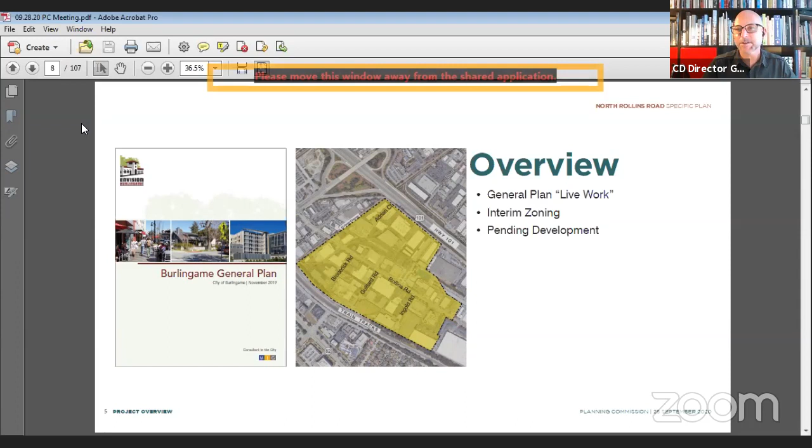We have interim zoning right now, which has guided a couple of the development projects so far. We will be coming back, spoiler alert, to the Planning Commission with a permanent version of that zoning next month. Meanwhile, we have had a couple of development proposals and projects, one approved and one under review, on Adrian Court and on Ingold Road. Those have been the sort of beta test or template for future development in this area.

Next, please. Oh, I am the next person, sorry. There you go. Do you want to introduce our committee too?

Certainly. So we have a community advisory committee, which includes two members of the city council subcommittee for this project, Vice Mayor O'Brien and Councilmember Colson. Then we have the chairs from the commissions: Audrey, Chair Say from the Planning Commission, Chair Wetton from the Transportation and Parking, Safety Commission, and Stephanie Lee, Commissioner Lee from the Park and Recreation Commission.

Then we also have a number of stakeholders from the project area, and we tried to be really representative in terms of both new players and long-established players. So you'll perhaps recognize some of the names here. I won't go through them all, but Guittard is probably one of the more established players, whereas Lisa Lilliland is from Proterra, who's probably one of the newer ones. And then Elaine Breeze, who you know well, represents the developments that have been in the area.

We also have an at-large member, Raymond Larios, who, while he's not within this project area specifically, we wanted to include a voice of the next generation, so to speak, in terms of interest in planning and transit-oriented development, and just have that kind of perspective as well.

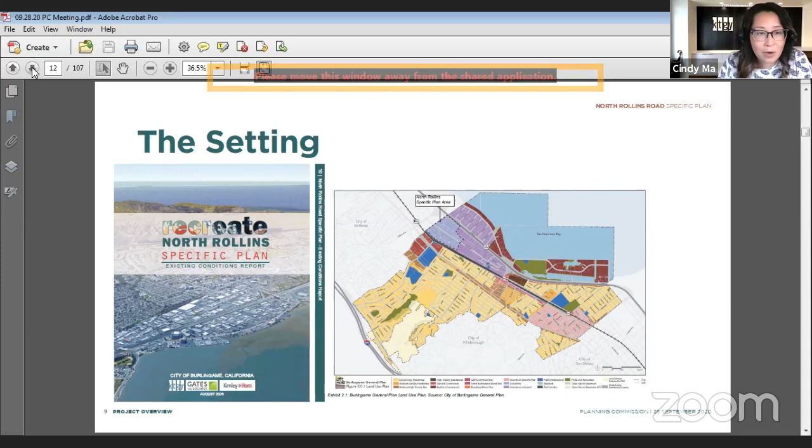We've included the general plan map on the slide just to show that the project area is on the northern edge of the city of Burlingame, right up against Millbrae, with lots of great opportunity in terms of what it can mean as an entrance into the city as well.

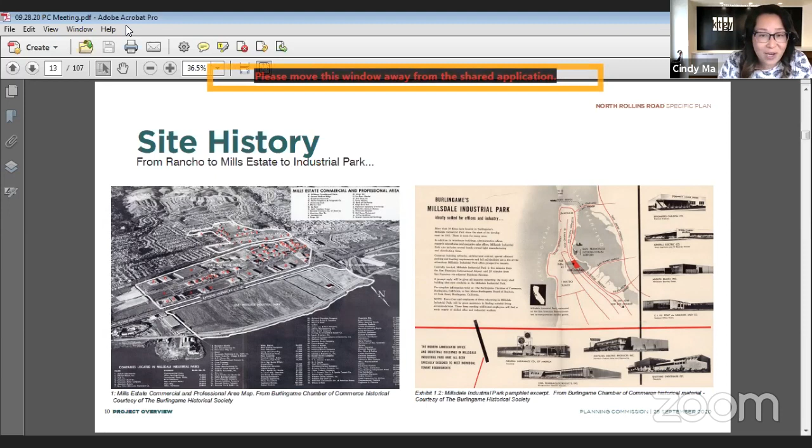When we delved into the project area history, we were connected with Burlingame's Historical Society and got really great information and graphics, which we wanted to share with the group here today. Before North Rollins became the industrial park we know it is now, it was originally native land, then the Buri Buri Rancho of the Sanchez family, and then the Mills estate from the 1860s to about the 1950s. We hope this historical context and narrative can be incorporated into the recreating of North Rollins on this project.

Of the 87 acres today, about 22% is used for industrial, including businesses such as Guittard, Seas, public storage, and other warehouse businesses with showroom components. 20% of the area is made up of commercial service and retail, including office headquarters of software, electronic, and freight forwarding businesses, and also sports recreation facilities such as Primetime Athletic Club. About 8% makes up commercial service, including moving companies and insurance offices.

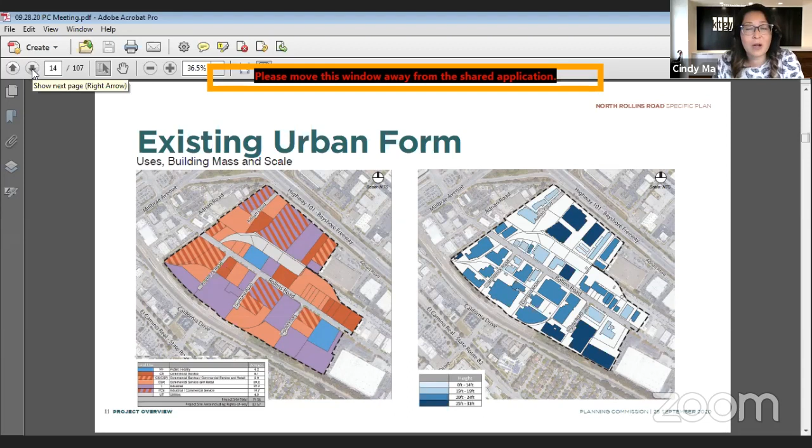In terms of the pictures, we noticed that while there are sidewalks throughout the project area site, they may not all be accessible. Some are very narrow with fire hydrants or poles sticking in the middle. There's many driveway curb cuts that can be quite disruptive for pedestrians. We understand they are necessary for the current use in the area.

There are large front setbacks, which we have seen creatively transformed into pockets with inviting landscape, assuming that's a residual of the subdivision parcelization that happened during the 1950s.

The utility and power lines are also very visible as we were walking around. They're located towards the east, but when we look towards the west, we notice there are quite a bit of peekaboo views to the hills down the secondary streets off of North Rollins.

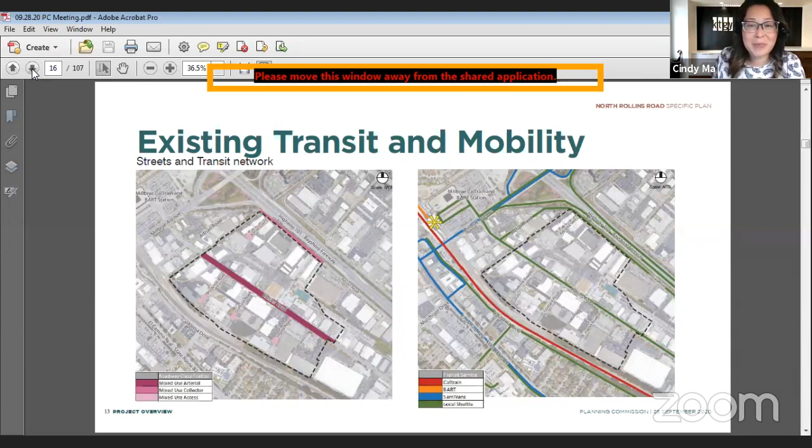So as mentioned earlier, one of the goals of the specific plan will be to identify and develop a strategy to create more open space amenities in the area. We're really seeing this as an opportunity to connect open spaces together and also to the overall health and project vibrancy.

In terms of sidewalks, again, as one of the previous photos show, they are existent, but they can be considered minimum along Rollins Road, and in some cases in the secondary streets need to be completed.

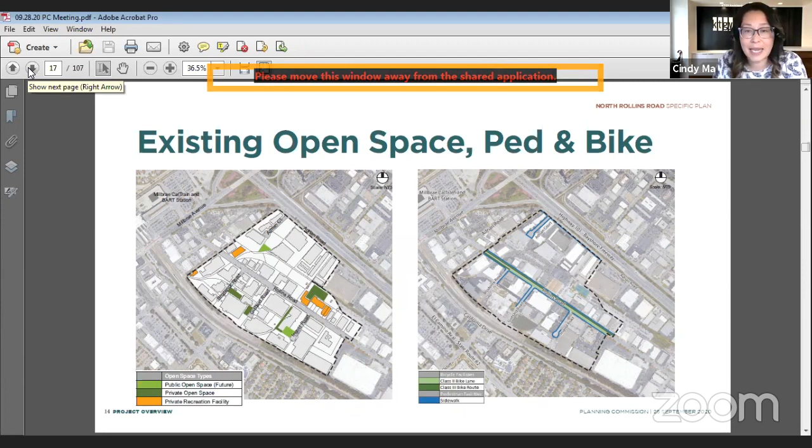I just went through a lot of information, and all of this is taken out of our existing conditions report, which can be found on the project website. We'll be happy to send a link out to the planning commissioners in the chat or after this meeting.

We understand the railroad tracks and the eucalyptus windrows are fixed edges, but how can we see them as ways to look beyond, with views to the hills and such opportunities? There's the El Portal Channel to the north, which could have great potential as an open space edge and also as an opportunity for a northern gateway. And then we have great views to the water to the east. In the TAC and the CAC meetings, we've heard suggestions and talks about how do we connect to the other side of the freeway.

So those are all things we're hoping to explore together. So with that, I'm going to transition this next part of the presentation to Linda, who'll go over the outreach strategy and lead us into the exercise.

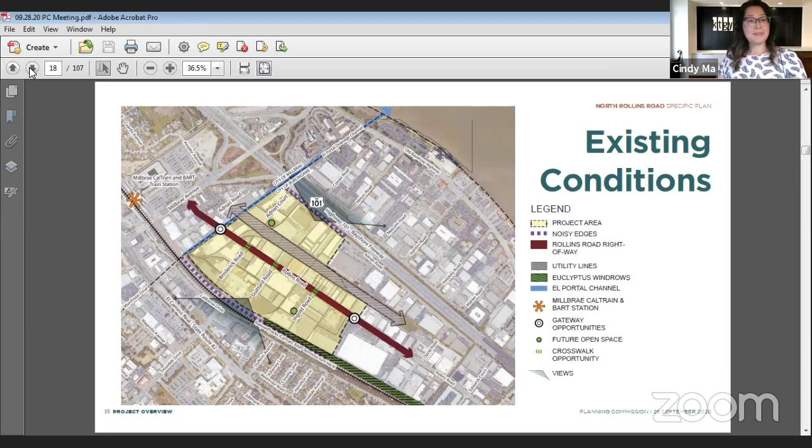Thanks, Cindy, that was great. I'm sure you all understand that a specific plan is only as good as how it is tailored to the specific values and needs of the community. To do that, we need to really reach out to the community. So we're proposing, as Cindy mentioned, a 4-phase process where we develop guiding principles, leading us to create some alternatives, a preferred concept, and then a draft plan.

At each phase of this project, we'll be meeting with the CAC, the TAC, and the community at large, as well as having key meetings with the City Council and the Planning Commission checking in. So this is really a community-driven planning exercise.

Next slide, Kevin. So to date, hopefully you'll have a chance to visit our website. We've got a website up where we're posting documents and sharing information as we go through the project. We have a great CAC, which your chair is actively participating on—thank you very much—who already have been giving us wonderful insights. The CAC also, we're hoping, will be ambassadors to other people, merchants, business owners, and property owners in the North Rollins area, to serve as a trusted source of information for people.

Next slide. We're having our study session with you right now. We're planning to hold a community virtual meeting in the latter part of October. One of the things I wanted to emphasize is that we're trying to really reach out to the local businesses and property owners in the North Rollins area. The community at large can participate, but we will be sending a postcard to everyone in the local area to really encourage them to participate and share their input in the meeting.

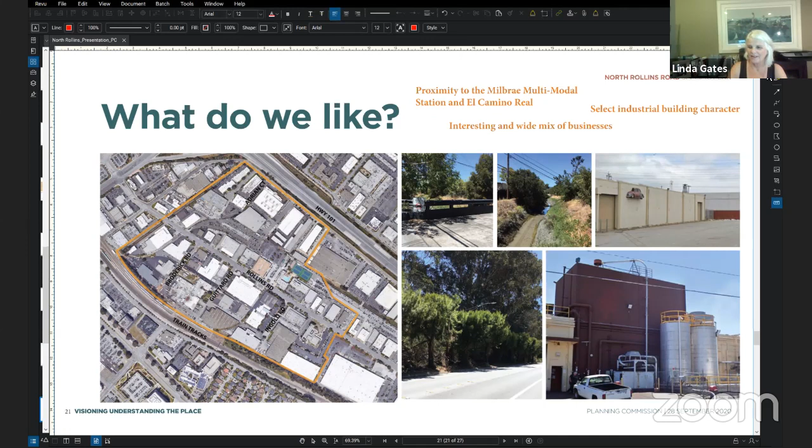Okay, yeah, I'll go first. I like the axis of Rollins Road, so I'd like to see the character from the south continue on to the north as it's developed. No, I'm being facetious from my last question. I think there is an opportunity for strong connections. I know we're looking specifically at the North Rollins Road area, but it is an opportunity for a strong boulevard scheme of some sort, and because of the width of that street, there's an opportunity for a street diet, traffic calming, et cetera. But before I go there, let me answer your specific question about what we like. Yeah, I agree.

I like the quirkiness, the opportunity for a mix of uses, not mixed use specifically, but a mix of uses - an opportunity for a multitude of things to happen in this area that could work together in harmony once it's well planned and detailed to create a neighborhood.

For example, I can't help but think back to when the SPCA was building their facility, and we had a lot of outcry over noise and smell that would come from that. That has not been my experience, or the community's experience, with that facility. It's been a great asset, and the overwhelming character of smell actually comes from Guittard's chocolate. I believe it was Council Member Brownrigg, Commissioner Brownrigg at the time, who said this is where we want industrial smells to happen - and it just so happens Guittard's chocolate is one of those industrial smells.

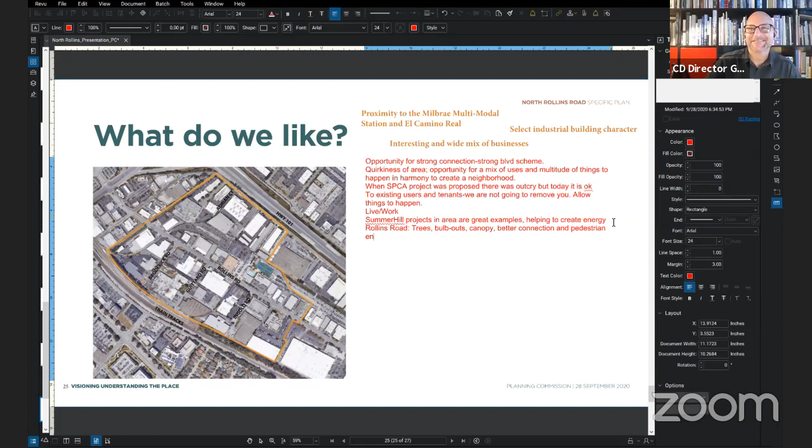So I'll stop now and let others comment. Thanks, those were great comments. I have a hand up from Commissioner Comaroto.

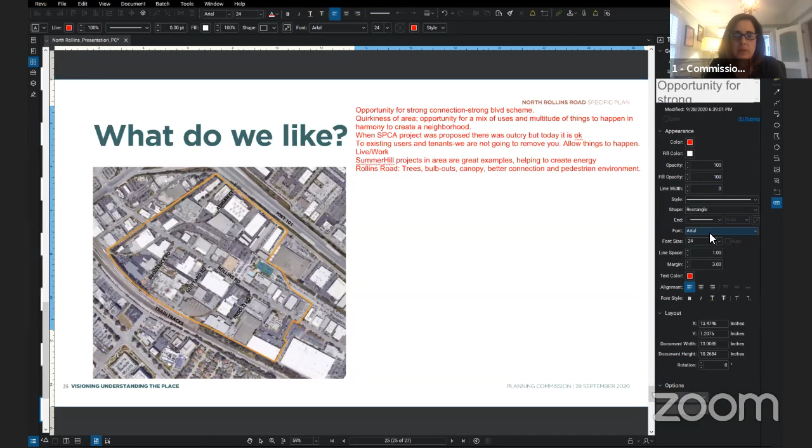Yeah, thank you for all your hard work on this. What I really like about that north area, having grown up here, was the access to the wide streets, riding our bikes. I think that's going to be really important for the community.

The other thing I really love is that we have the opportunity now, with the large wide streets, to get foliage in there and soften some of this landscaping, and provide green area for kids to play and for the new facilities that are there for people to be outside. I'd love to see some outside space.

One thing I brought up at a meeting a while back - I don't know if it's possible - but going back a long time ago when I lived on Paloma, we were members of Prime Time back in the late 70s, early 80s, and what we would do is cross the train tracks, which is illegal now, to get access for people living in the residential space over to that area for an evening of entertainment, some of this mixed use that might be open later in the evening. So we could really capture some of this North Rollins Road area. I'd love to see some sort of access, I don't know if that's even possible, but I would love something like that.

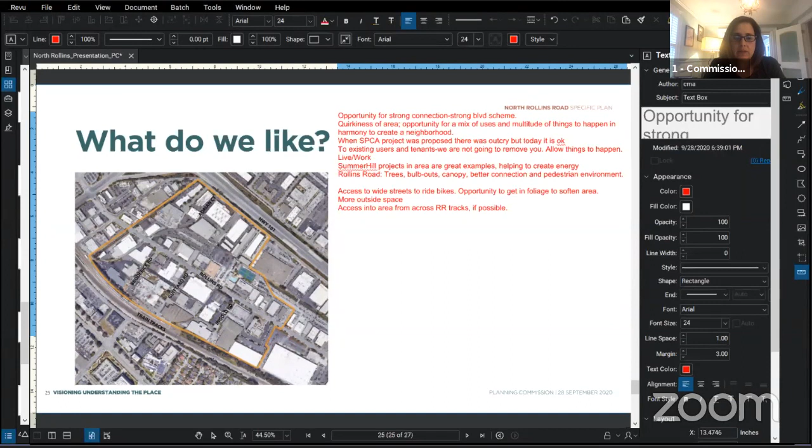We used to ride our bikes over as kids and have a great time, so I'd love to see some of that. I like the quirkiness of the area - I think of it like Santa Barbara's funk zone, and I'd love to see some funkiness and art and new creativity from people living in or who own property in that area.

So part of me also doesn't want to make it too confining of what you can do there. I'd like to just open it up and let's see what people come up with.

Of course, I know we have to have rules and regulations around some of this, but I'd really love to see some creativity in that area, and I think it's a perfect place for it. It's interesting, a lot of the themes that you're going, like Santa Barbara Funk Zone and stuff, the CAC was mentioning the dog patch. So Burlingame sort of seems to have a very shared vision here.

Thank you. I see a hand up from Commissioner Loftis.

Yeah, I mean, this is a funny question. What do you like about it? It leaves me cold, I got to say. It's a very utilitarian place, and I don't feel one way or another about it. It's an industrial area pretty much right now. So I find it hard to answer that question.

I think the trick here is that the document we've got and all the sentiments that have been expressed talk about creating a completely new neighborhood, and that begs the question: well, what does that mean? What's a neighborhood mean? What is it you're trying to achieve if you're trying to create a neighborhood? I don't think it's a matter of pure geography personally. I wouldn't consider it a neighborhood right now, but that's just me. I think a neighborhood requires something beyond going there to work during the daytime, and it implies that there's some sort of high level of social interaction.

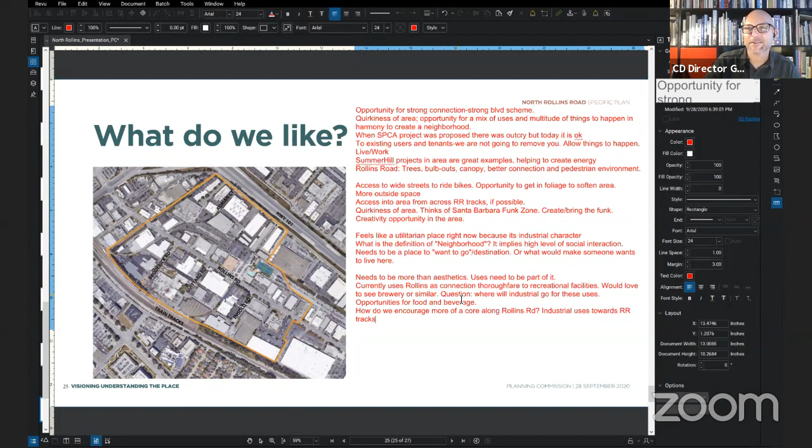Just to piggyback on what Commissioner Schmid and Commissioner Loftis said, I think a lot of people go down Rollins Road because the traffic is so light. I'm actually there at least once a day, because I have suppliers down there for construction projects, some in the northern end and some in the southern end. But when we start talking about a neighborhood, in my head I'm hearing living spaces, and that's going to clog things up a bit.

So I wouldn't try to make it so much of a neighborhood. I think things like a brewery or some open-air restaurants would happen as residential living comes in, which is already happening. As we watch it evolve, we'll get some of those, but I would be cautious not to get rid of all the industrial uses and push those people out, because that actually makes the traffic lighter.

If you made the property so valuable that the Guittard Chocolate said, hey, let's sell this and move, then all of a sudden we don't have those good smells anymore and we're just going to have housing. There are a lot of industrial uses down there that even the people of Burlingame use, for supply houses, showrooms, and distribution centers for things we all use. So I'd just be careful to keep it as a very mixed use — that would be my comment.

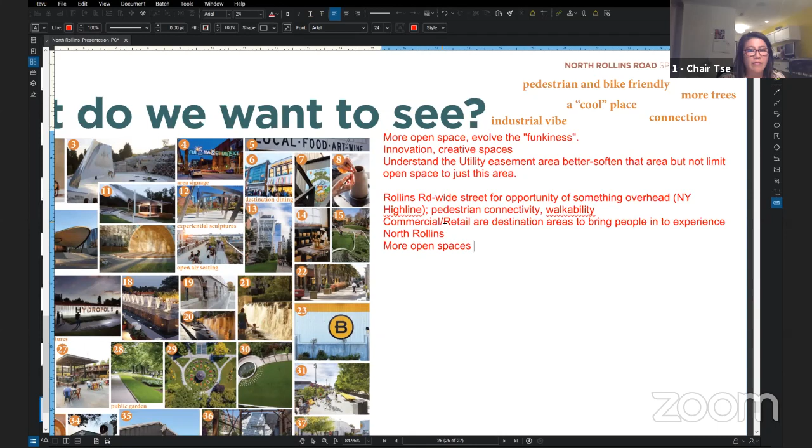I would love to see all the green spaces, potential for some kind of outdoor entertainment or mixed use, maybe outdoor dining mixed with the event space. I think there was an image, maybe 16. And below that, number 27, that might be an opportunity to enjoy open space, open air, have some dining, maybe some concerts, live music kind of space, comedy area.

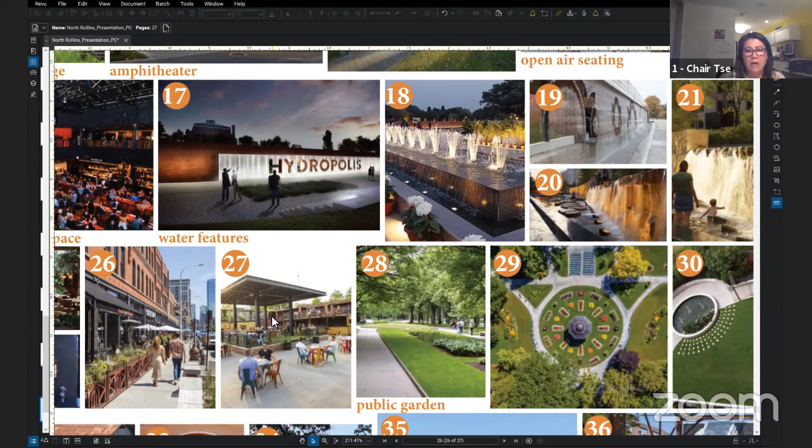Noise will be a little less of an issue there in that part of the city. And although there will be living spaces nearby, it's a little different zoning here with the combined zoning and use of the space.

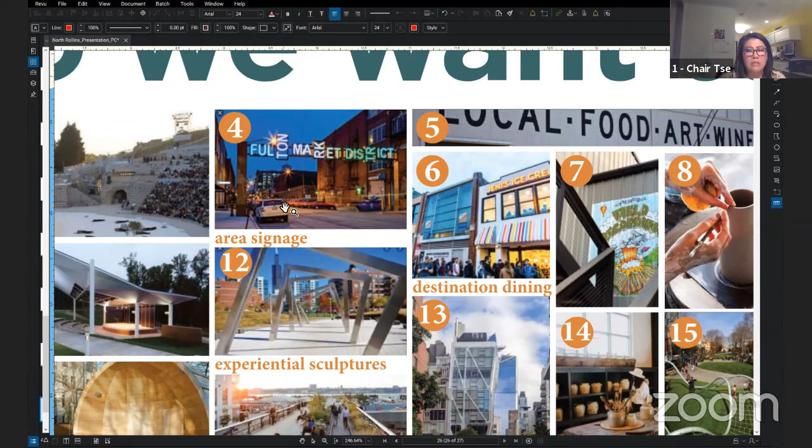Lastly, I wanted to say I would love to see some type of cool signage like in number 4, some type of official entry point to this North Rollins Road area, both on the north side and the south side. As you enter and leave the area, it'd be a great opportunity to welcome visitors to this particular part of the city.

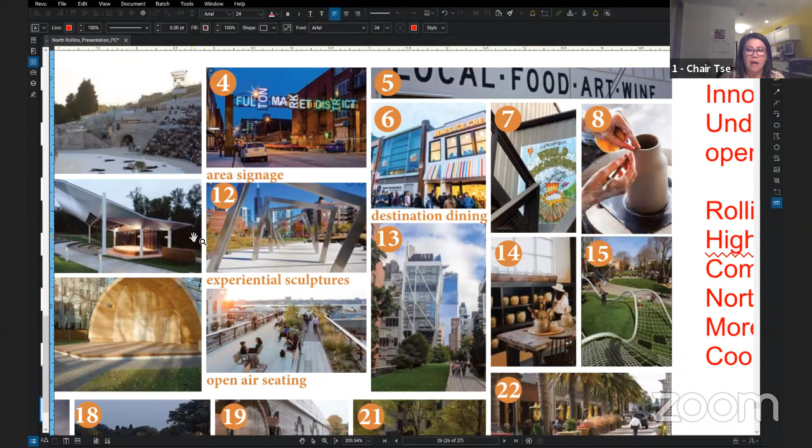One more thing, in number 12, the opportunity potentially for some outdoor experiential art or sculpture that one can walk through and enjoy. It could be part of an open park area. Obviously it doesn't have to be as large or to this scale, but something that would add interest so that people could feel like it could be neighborhoody, and that people would want to be drawn to this area to come and experience.

I also talked about the Chicago bean, which draws people from near and far to look at this reflective sculpture that you really can't experience other than looking at your reflection and seeing the areas around it reflecting off its curved form. It's just such a simple idea, and it adds so much interest to an area.

Thank you. Thank you. And yes, the chair had contributed a lot of photos. Other people in the CAC had contributed photos of what they wanted to see. So this was, you know, we're architects, a picture's worth 1,000 words to us. So that was wonderful.

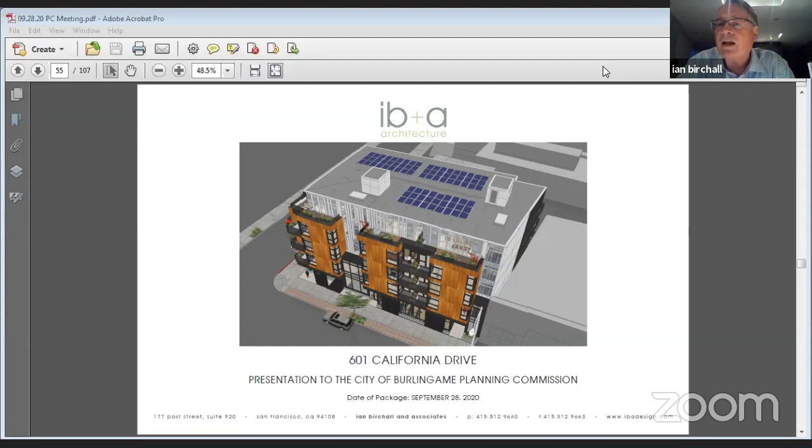Thank you. Okay, so I've been told that I just say next slide and there's a magic wand and we move to the next slide. That's right. Next slide, please. This is a data sheet, and my standing joke for 18 years in San Francisco and the Bay Area is there will be a test later.

This is a 25-unit project. They're all one bedroom; some of them are larger with a one bedroom and a den. We have 25 parking spaces. And as has already been described, we have some common area facilities on the ground floor. Next slide, please.

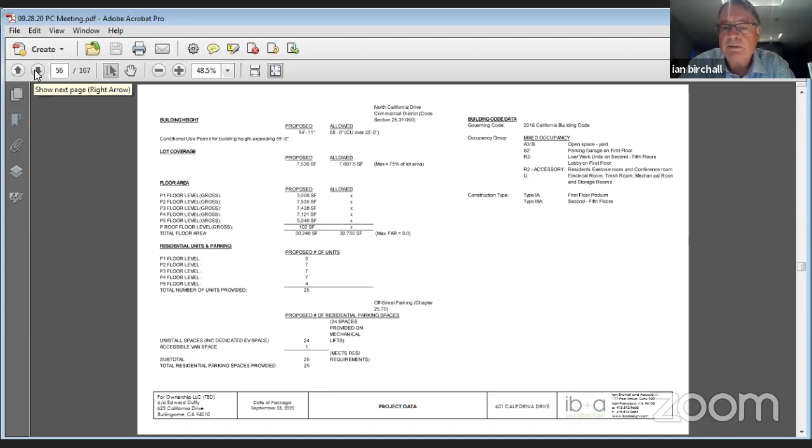This is the site plan, and it shows the photovoltaic array on the roof, its relationship to the existing buildings, and also to the neighborhood residential. It's obviously the intersection of California and Floribunda. Next slide, please.

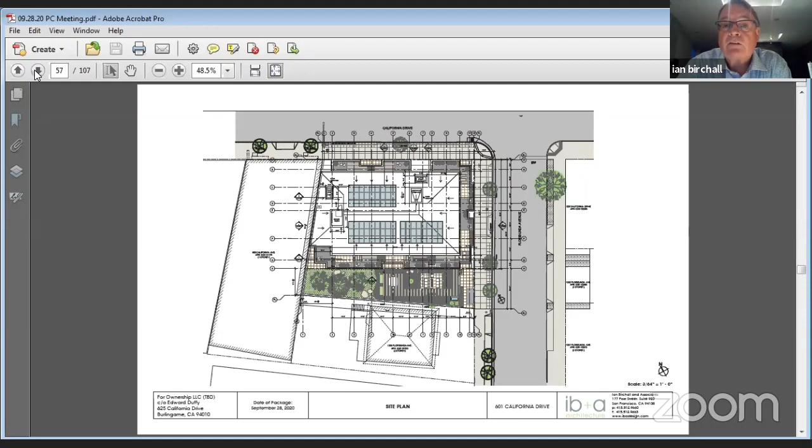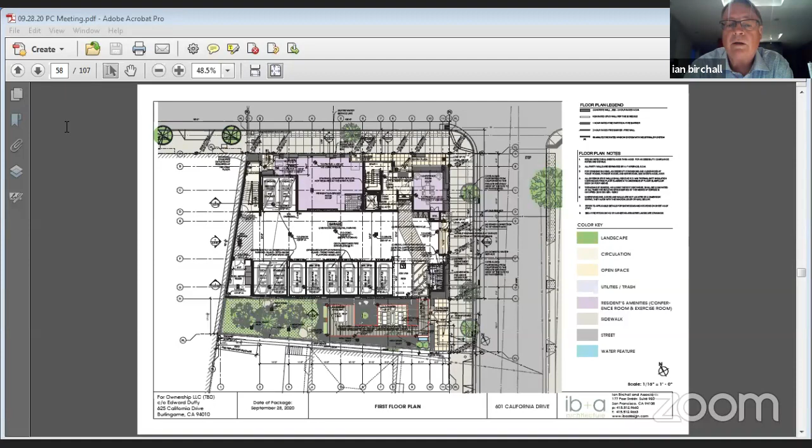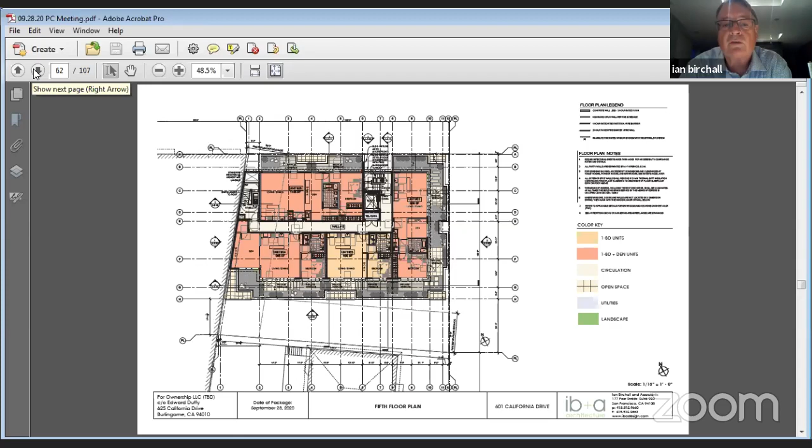We can skip through these very quickly. Next slide. At the top floor, we've set back the floor plate; that also helps us stay within the allowable FAR. The change in color designates that we have 1 bedrooms with a den, and each of these units at this level has access to basically a rooftop terrace, which you'll see in the section, elevation, and renderings.

Next slide, please. I will skip through these again quickly because I think the renderings show more about what we're trying to do, but the siding you see here is a Parklex. It's a phenolic resin thin sandwich panel that forms a rain screen over the facade, very similar to the one we're using on the building on the other corner. And here's the top floor setback.

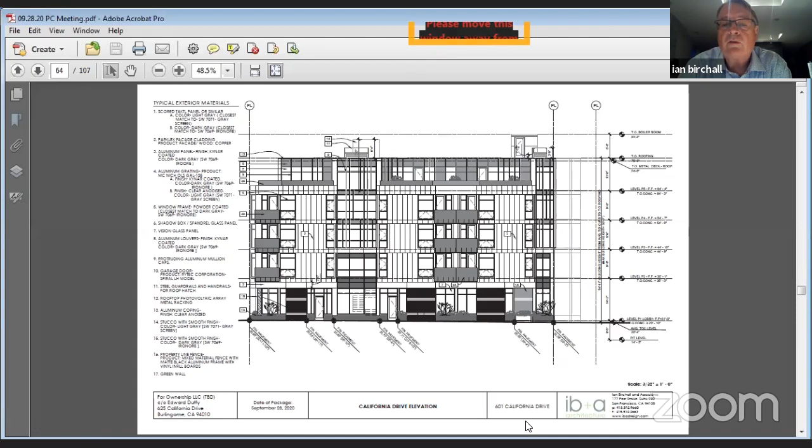Next slide, please. This is the main elevation to California. Next slide, please. Building section shows the parking arrangement and the units up above, setback at the top floor. Next slide, please.

Context photographs, I think you're probably very familiar with these. Next slide.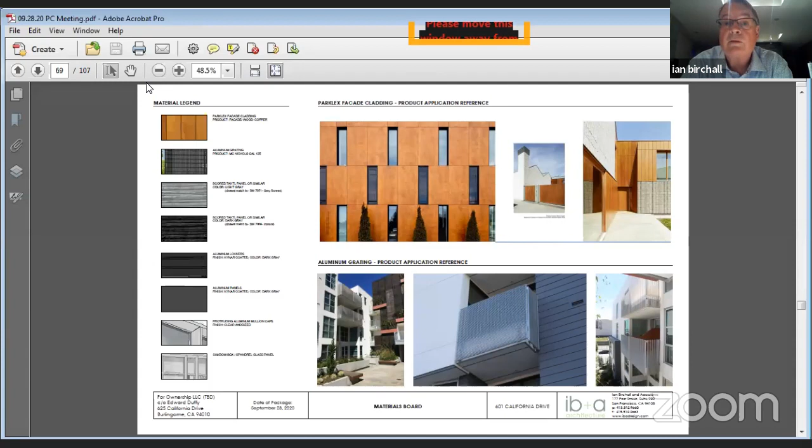These are two buildings at the shipyard we did. Next, please. Thank you. And the nighttime view to give you an idea of how the building would be seen at a dusk viewpoint.

The entrance is here. This is the main staircase running up here. This is the second staircase, top floor units. The gratings, as you can see, a certain amount of transparency. Next slide, please.

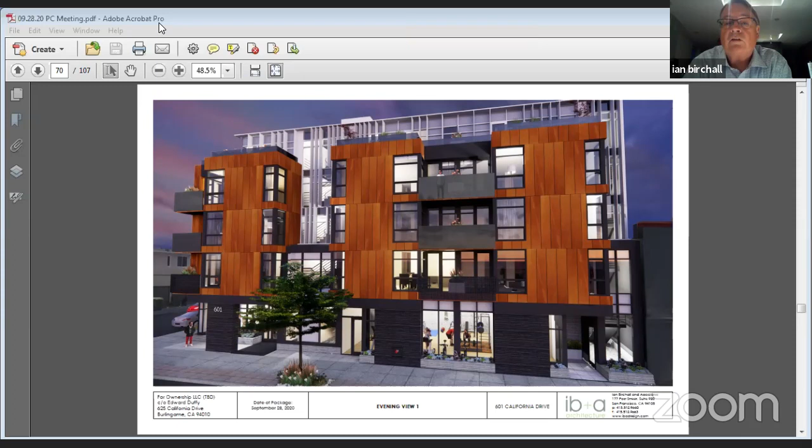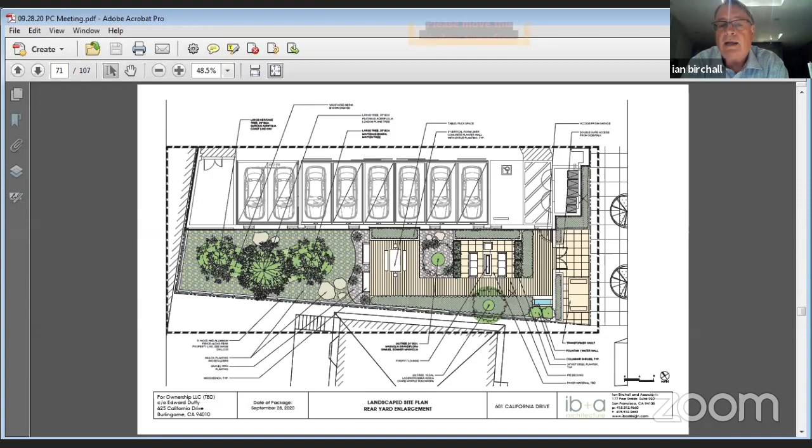The rear yard landscaping. I think we provided more information on this in the package, but this is just to give you basically an occupiable area and then a passive area that links with a passive area on the private garden to the rear of this home. So we wanted to try to respect that area here. So we're keeping our active landscape area more towards the street side. Next slide, please.

I think this is the last one, and I'll be happy to leave that up and take any questions that you have at this point. Thank you for your attention.

I can't hear people. You hear me? Yes, I can now. Thank you. Okay. We're now going to take questions from the commission for you.

Commissioner Loftis: the reason I was asking about the material sample panel is I asked the question in our last meeting about the glass, which appeared to be smoke gray charcoal glass, and it's rendered entirely different here, but I don't see it called out anywhere. Maybe I'm just missing it. It's called out the same on sheet 3.0, it's just called out vision glass panel. And on sheet 5.0, what was shown as a gray glass panel has disappeared from the sheet entirely. What's the nature of the glass? Is it clear the way it's rendered here?

Yes, sir. We took your concerns to heart, and we're making sure that we're using a fully transparent glass. Obviously, it's double glazed, so it'll be a low E to the inner pane, but there's no tint to the glass. I just wanted some clarification. Thank you very much. I'll be happy to submit a sample for the record as well to make sure that you have that.

We're making the entrance to the exercise room come from the street side, so it's accessible also from our other building at the end of the block here. It is possible for us to find another entrance within the building, but quite frankly, we're trying to activate access outside the building back into the building, in keeping with the spirit of what we're trying to do on the ground floor.

Okay, that makes sense. So the building at the corner of California and Oak Grove will also have access to this exercise area? That is the intention, and I'm couching obviously a response here. I can't say definitively yes, because this goes down to condo rules, regulations, CC&Rs, but that's the idea, yes. And that's why the door is on the outside, so that people don't have to come into the building, break a plane of security in order to use the exercise room. The owner is all for it. Our client for both buildings is one and the same. So it's just a matter of putting it into words.

Okay, and then how do you see the conference room being used? We see that... I'm president of my own HOA, the meetings are held in my apartment. That's one way that conference room is going to get used.

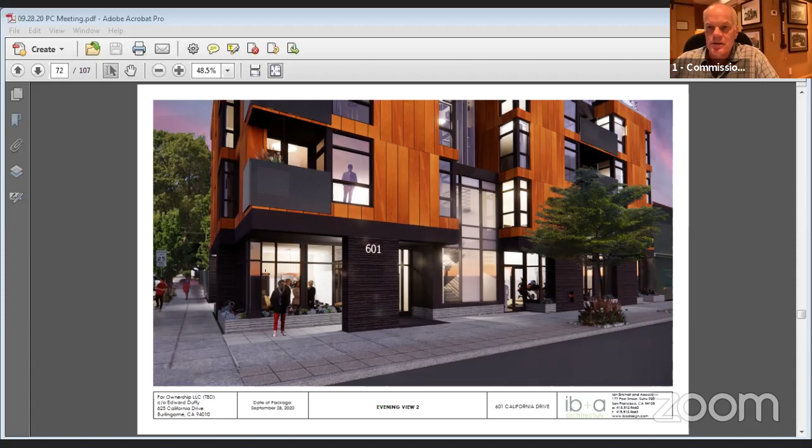Yeah, it sounds kind of narrow, and to hear that you've had success with it in other buildings is actually really helpful. Thanks very much. You're welcome. Thank you.

Commissioner Schmidt: Hi there, thank you. Great presentation. Just a small detail I was noticing is mail - there's a small area for mail, but as we are all becoming more work-live, getting a lot more packages and things, is there room or a back storage that I'm just not seeing in the plan that's going to enable you guys to receive them?

Yes, the intent is a small building, so that mail area is actually quite large for 25 units, but we're looking to put parcel lockers above and below the mail area, so there will be places to drop off larger packages. The conference room has a lockable closet at the back there, so there are ways in which that could be incorporated into a drop off.

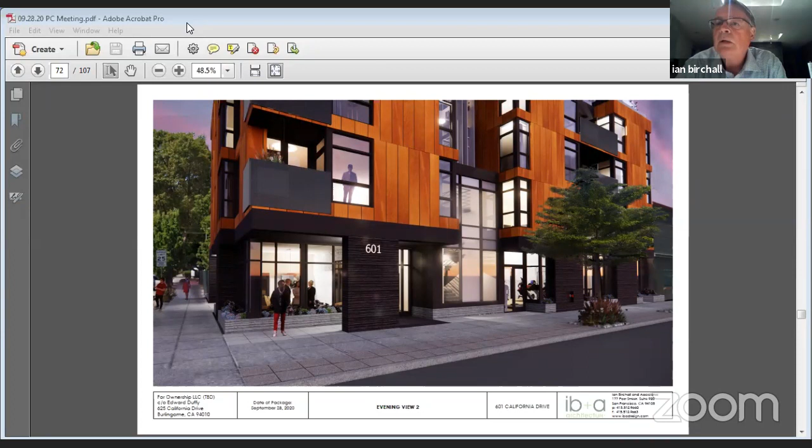And thank you for raising that concern, because as president of the HOA, I'm having to tell all my members to pick up their damn packages from the front - I'm tripping over them getting into my building. Perfect, thank you.

All right, thank you. I'm going to ask if there's anybody in the public who would like to speak on this item. So, Madam Chair, I do not see any chats, I do not see any emails, and there are no hands raised.

Okay, with that, I am going to close the public hearing. Commissioners, comments? Commissioner Loftis: Yeah, I think this is really quite a handsome building now, and I really appreciate the applicant and the design team responding so well to our comments from the last meeting. I was looking back over them, and I think we were pretty clear that it didn't work then, and I think it totally works now. I'm really impressed with the attention to activating the street front with activities inside the rooms, and I really appreciate that the glass promotes interaction between street, inside, and outside. I think it's a very, very nice project.

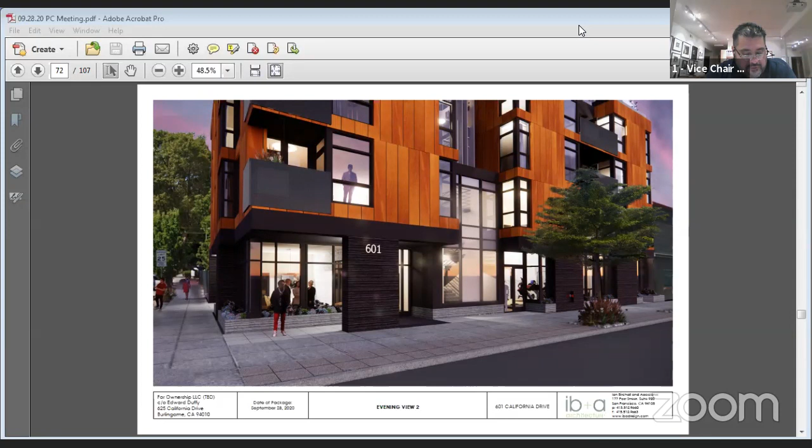Vice Chair Terrones: Yeah, I agree absolutely with Commissioner Loftis's comments, I won't repeat them, but the other thing that I really appreciate is the sensitivity to the transition along Floribunda to the residential neighborhood. There's a nice buffer, a wedge of buffer that ranges from about 27 feet down to 18 feet to that neighborhood, which I think is going to be very helpful with that transition. So I think this is a very nice solution. I don't think this will be detrimental to any properties in the neighborhood, so I can make the findings for the conditional use permit. I think it's a very nice urban solution for this location - it's the right place for this type of increased density.

Commissioner Schmidt: Yes, thank you. Being new to the commission, this is my first time seeing this. I didn't see it in the study, but I think you've done a really nice job with it. I appreciate the materials, they look nice. I think the overall project is going to be a successful one there, and I look forward to seeing it.

Commissioner Comaroto: I like what you've done on the project. I love the transitions, and I love that you've stepped it away from the main street and the articulations on the different floors. So thank you for all your hard work on this. Thank you.

All right, I ditto all the comments from my fellow commissioners. Very nice job, and thank you for the nice, brief, succinct presentation and to the point.

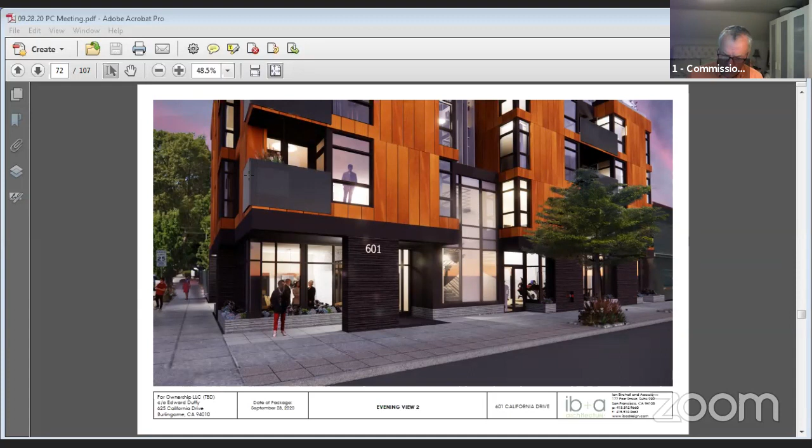Commissioner Loftis? Yeah, I move that we approve the project, including the conditional use permit. I second that. I think I heard Commissioner Sargent first, so I will take this motion by Commissioner Loftis, seconded by Commissioner Sargent. Is there any discussion on the motion?

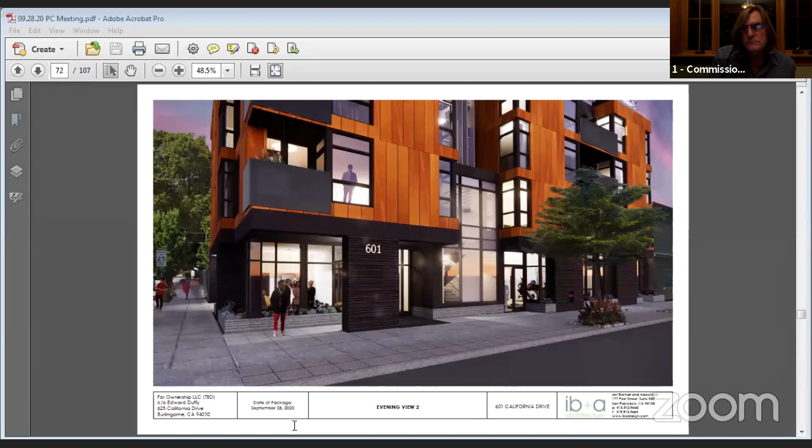All right, may we have a roll call vote, please? Commissioner Comaroto, Aye. Commissioner Gaul, Aye. Commissioner Loftis, Aye. Commissioner Sargent, Aye. Commissioner Schmidt, Aye. Vice Chair Terrones, Aye. And Chair Tse, Aye. So the motion passes 7-0-0-0.

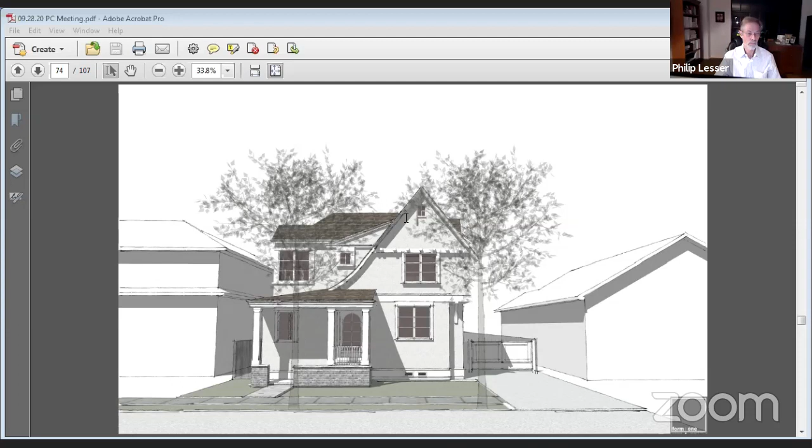In summary, the applicant requests design review for a first and second story addition to an existing single family dwelling and front setback variances for the proposed first and second floors. I'm available for questions, and the applicant is in attendance to also make a brief presentation and answer questions.

Any questions for staff? Seeing none, I'm going to open the public hearing. Would the applicant please come forward, state your name, and add anything you'd like about the project?

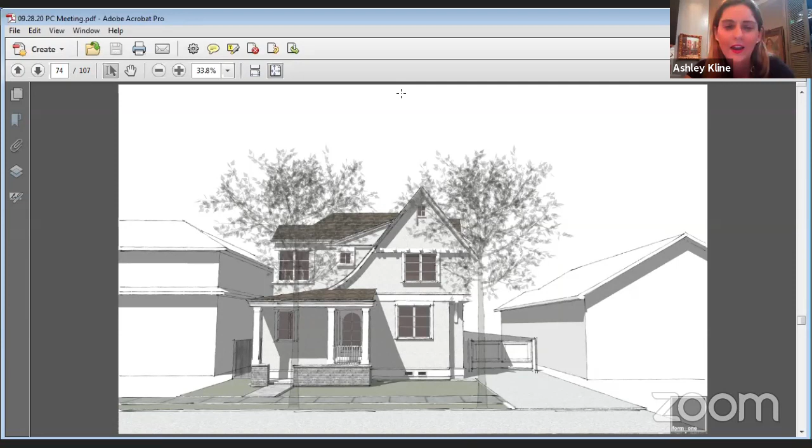Sure. Hi, I'm Ashley Kline. I'm the homeowner, and thank you, all of you commissioners. I have so much respect for the work that you do and the time that you spend as volunteers on the commission. I purchased my home in 2013, and as I could afford to, I've been very slowly trying to update it. I replaced most of the landscaping myself. I'm a single parent, and so I've been saving for a long time to be able to afford this addition.

One of the constraints that I have is to use the existing house. It's going to help a lot with my budget, especially since I've already updated the bathrooms and some other things inside. Tim and I worked hard to try to create something that's unique but also true to the neighborhood, and we took a lot of inspiration from the houses nearby. As you guys saw, finding a way to incorporate the existing front entry and the porch was a little challenging just based on what's there and the way that my house is situated on the lot.

What you have in front of you is my first choice. We also tried something else, but we think this is the one that's the most aesthetically pleasing, and also gives me a place to welcome neighbors and look for my keys in the rain. I've had a lot of dialogue with my neighbors. I know you have all those letters, and I haven't received any negative comments about the project. So thank you for your consideration.

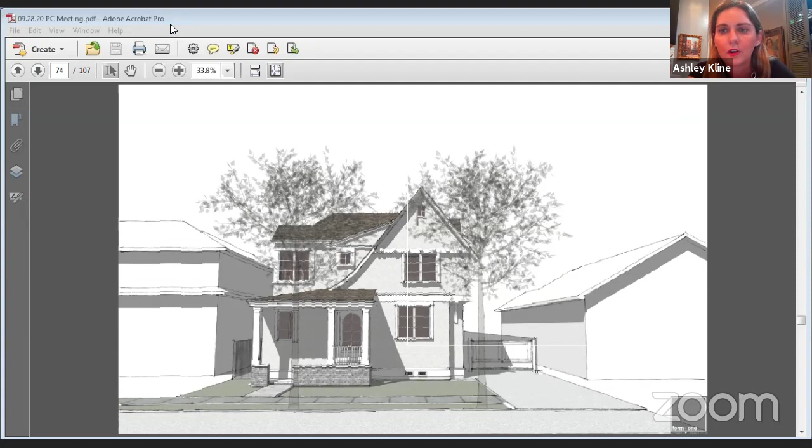Thank you. Are there any questions for the applicant? And my architect, Tim, is also here. Great, thank you.

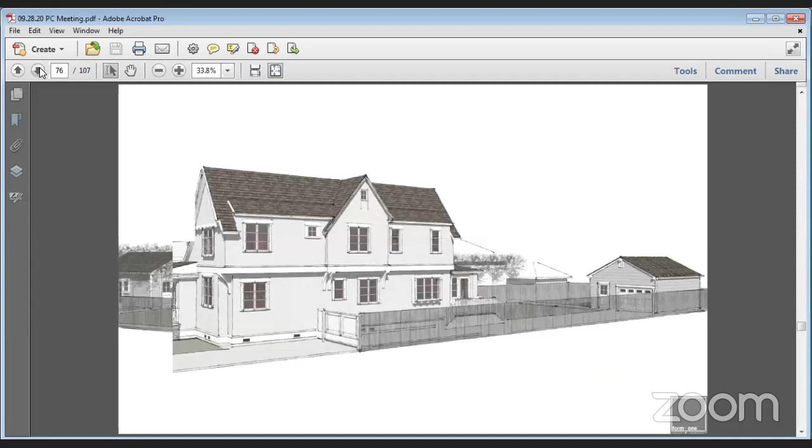Good evening, this is Tim. I just want to hearken on the style - we're doing a transitional English European style home. It's a little bit of a departure from what I normally do, which is shingle style. I'm excited, and you'll see in the 3D and 2D drawings that we've detailed a lot of the house - it is a custom home. We're here to take any of your comments and answer any of your questions.

We have a question from Vice Chair Terrones. A couple of detailed questions, Tim - can we go back to the front elevation in the presentation?

In the 2D drawings in front of us, Tim, you have two cedar or redwood brackets, and they're both appearing on that front plane that's farthest forward on either side of that window on the first floor. Whereas in the SketchUp model, you have one knee bracket where it appropriately would occur, where that steps back. We would like to have it overhanging like we have on the 2D - that was a review we had with Michelle about the variances. It would look way better if the second story just came out a foot or 8 inches, whatever you guys feel is adequate.

Okay, are we reviewing what's before us tonight, or are you asking us to review something else? No - presenting, the 3D should be pushed forward. You would be reviewing the 2D drawings. Okay, but then the 2D drawings are not up to date fully, because I'm not seeing that portion of the facade pushed forward on the side elevation, and not seeing those knee braces or brackets occurring anywhere.

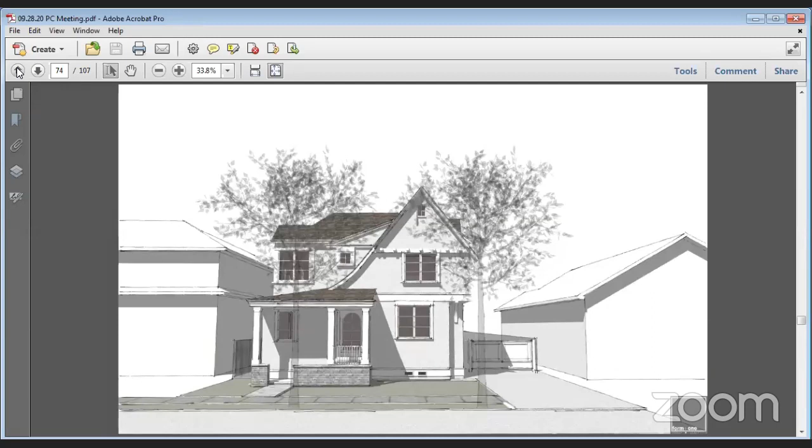Can you go to the 3D? It's more than likely it's just the rendering, and I can make that a little bit less pronounced so it doesn't look like that. Just curious, because I wasn't sure in looking at the 2D drawing, because of that profile around the casing, if that meant the windows were set in or boxing out, or no, it's just the 3D rendering, and I can fix that.

Okay, but then you would also want to fix, I think, on the 2D drawings—well, I don't know if you would have that profile line—but I just want to make sure I'm not seeing something that's not actually happening. Okay. And then my other clarification question is going back to the variance, Tim.

Am I correct in understanding that the porch is not coming forward? It's in its existing location, correct? Correct. And so the only—go ahead.

So the porch is existing, and all we are really doing is covering the approach, and we are raising up the entryway so that it creates a porch, which is a planning standard that everyone seems to want, and we want, because it creates this cool detail for the entry, and it's covered. Yeah, it's nice.

Okay, to cut to the chase, I can find support for it. I just wanted to clarify that what's tripping the need for a variance on the first floor front setback is just because the porch isn't coming forward—you're just increasing the amount of cover over it. And so that's why. Correct. Okay, got it. Correct.

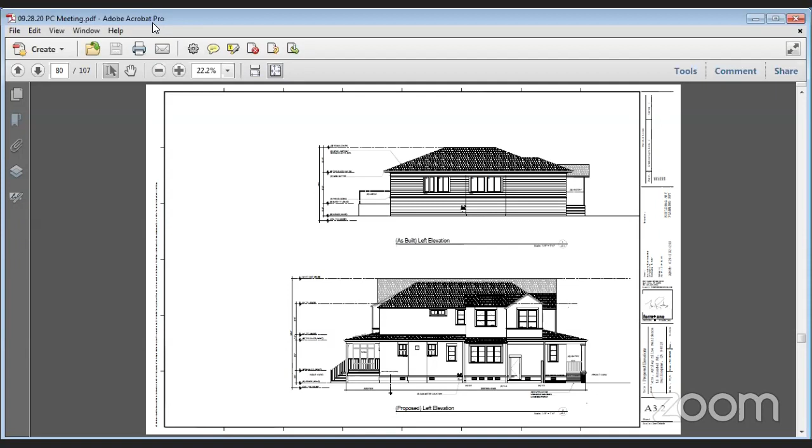We will take that under consideration. I think we can review that and come back to you.

My other question is about the overall roof in general. You've got a big flat area in the middle, which, because of the way the roofs are going up, tends to make the house look more massive. Given there are two-story houses on that block but also a lot of smaller single-story homes, I'm afraid this is starting to look bigger and bulkier than those other homes. Did you look at just getting to a regular peak on the roof? Usually you'd see this when there's an upslope lot, but you're on a flat lot here, so I'm not sure why you ended up with a big flat spot in the middle like that, a kind of chopped-off roof.

We are trying to go for an English style house, more transitional, and a lot of those houses do have a more peaked or aggressive pitch. It's also a good spot to hide the mechanicals and avoid plumbing flues on the actual roofing, which doesn't look great. It's also a great place to put the solar.

We'll look into decreasing it by making the pitch a little less aggressive, but I think it really draws away from the look of what we're trying to achieve. Okay, thank you.

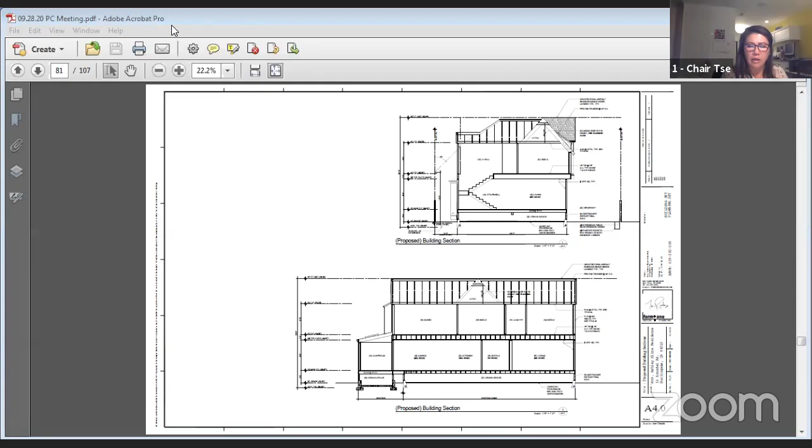Well first of all, I think it's a nice design. I can generally find support for the variance application. The reason I say that is not to be a smart aleck, Tim and Ashley, but in regards to what's going to get finalized before us. Let me say what I can find support for: at the first level, the front setback, first floor. I think it's great to create more presence for that front porch. If it's not coming forward any further than the existing, and you can clarify that on the plans and site plans, and make sure planner Michelle understands that, I think there's support. It's an existing condition, and you're simply improving it and making it a better porch.

In terms of the second floor setback, what I can find support for is because you're creating a gable that's asymmetrical, sort of on the left-hand side, trying to spring from a first floor plate height with that swooping barge on that side.

I think I could find support for that, but if that second floor came forward even more, I think it's pressing the issue. What's happening is you're creating an asymmetrical gable, and I could find support for that, but architecturally, I think it would help support that gable if it had windows aligned down the center of that gable. I think that's what strengthens an asymmetrical gable. If you take an asymmetrical gable but start kinking over the windows as you work down from the top attic vent to the second floor window to the first floor window, it sort of defeats the whole idea of an asymmetrical gable.

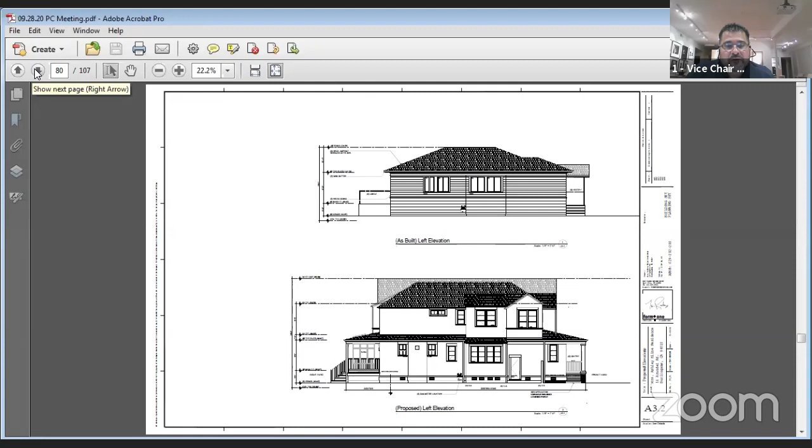If we could flip to the left elevation. Yeah, on that one, if you look at that asymmetrical gable on the second floor, this one works because the window's centered on the gable, but you just let the left-hand side kink over a little bit longer, and you get some playfulness with those gables.

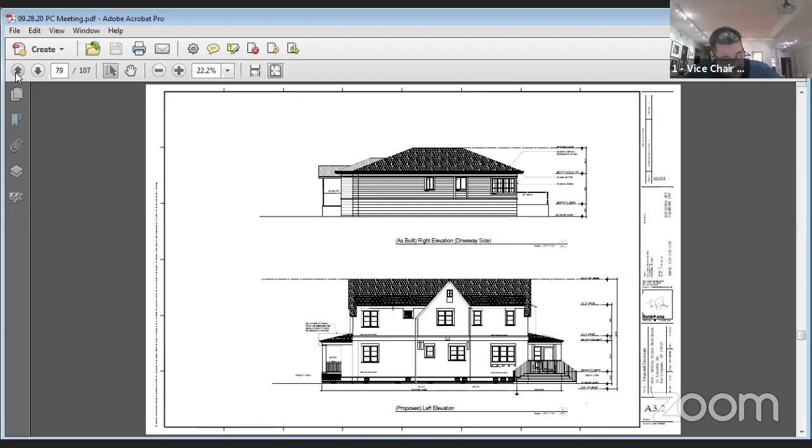So I think those things can work if you just revisit and resolve them. Going back to the front elevation, resolve what's happening with those knee braces. If it's just the one off to the side where you've got that little portion that stepped back, like shown in your 3D drawing, I think that works really well. And I could support that version of the application for the front variances because of where the house is built relative to the rest of the neighborhood as an exceptional condition. So those are my comments.

Thank you. Commissioner Schmid? Yes, thank you. I actually agree with Commissioner Terrones quite a bit. I actually like the asymmetrical design. I think the roofs really work for it, and I really do like it. But I do agree with him that window alignments will make it stronger. I hope that works on the interior as well. I know that's a challenge, laying those things out and making them work. But I would support that as well.

And I want to say the 3D images are a huge help. This is a complicated house with a lot going on, and I think, Tim, you did a great job bringing those 3Ds. They just need to get in alignment with what we're approving so we can say we like it and approve it. But huge help, so I appreciate you putting in that effort. And I feel very supportive of this project.

Commissioner Sargent? Yeah, I like the project as well. And I would agree that the variance for the first floor setback is supportable, assuming the clarification with staff confirms that it's not increasing the encroachment. But I think the second floor variance could use some more study by the applicant. I'm not convinced that is supportable, and I think there's a lot of flexibility with this lot. I mean, it's a very deep lot, and there's still a lot of space to work with here.

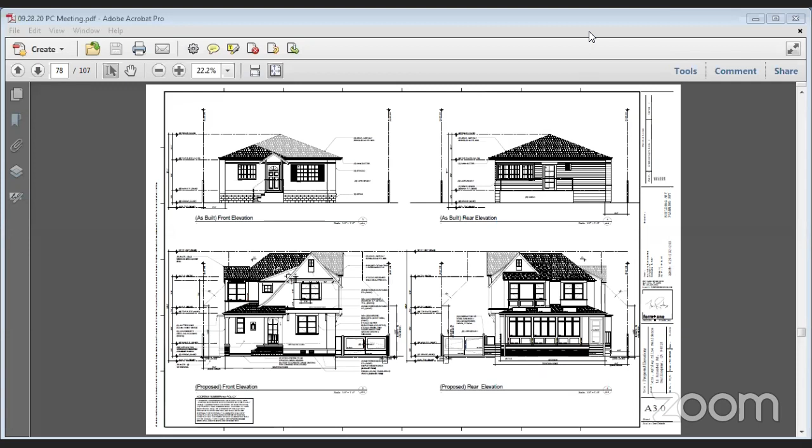Commissioner Sargent: I move we bring this back on the regular action calendar. I'll second. All right, so we have a motion by Commissioner Sargent, seconded by Vice Chair Terrones. Is there any discussion on the motion?

Have a roll call vote, please. Commissioner Comaroto, Aye. Commissioner Gaul, Aye. Commissioner Loftis, Aye. Commissioner Sargent, Aye. Commissioner Schmid, Aye. Vice Chair Terrones, Aye. Chair Tse, Aye. The motion passes 7-0-0-0. This action is not appealable.

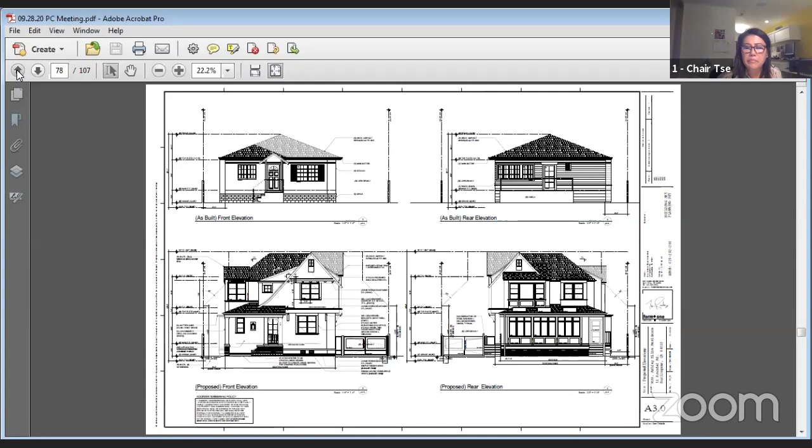Thank you. Thank you very much. And now we're going to go to agenda item 9B, 1418 Bellevue Avenue.

Were any commissioners not able to visit the project site, or do any commissioners wish to note any ex parte communications regarding this project? Excuse me, Madam Chair, but I'll be recusing from this item. Thank you. Let the record note that all commissioners present have visited the project site.

May we have a staff report, please? Yes, the applicant is proposing a lot split of the existing 28,333 square foot lot located at 1418 Bellevue Avenue, zoned R4. The existing 4-story apartment building will be retained on the proposed parcel 1, and the proposed lot split would create a second 9,832 square foot lot on parcel 2.

The proposal on the newly created parcel 2 includes construction of a 6-story, 15-unit residential condominium building with an enclosed at-grade parking garage. A cross-access easement is proposed to provide ingress and egress and vehicle circulation for both sites. The proposed project includes 2 units that would be affordable to moderate income households. As such, the project is eligible for a density bonus concession, as well as unlimited waivers, provided the waivers are necessary to allow construction of a development at the densities provided by the density bonus law. The downtown specific plan and corresponding zoning do not provide for specific density limits.

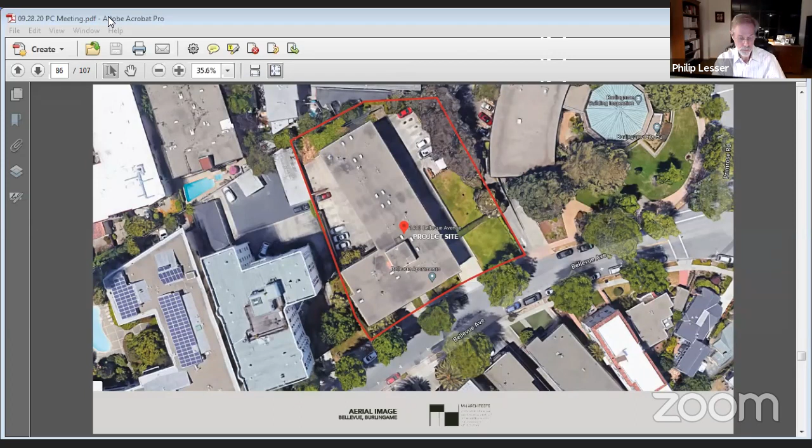That existing building was built before there were storm drain requirements, so this is going to become safer because we're going to put a storm drain in here. Also, the electrical transformer is on the green side right now. That's going to be moved over to the chartreuse side, and the new building is going to go in on the green. Like all new buildings, it'll be 100% electric, so it's going to be eco-friendly in that regard.

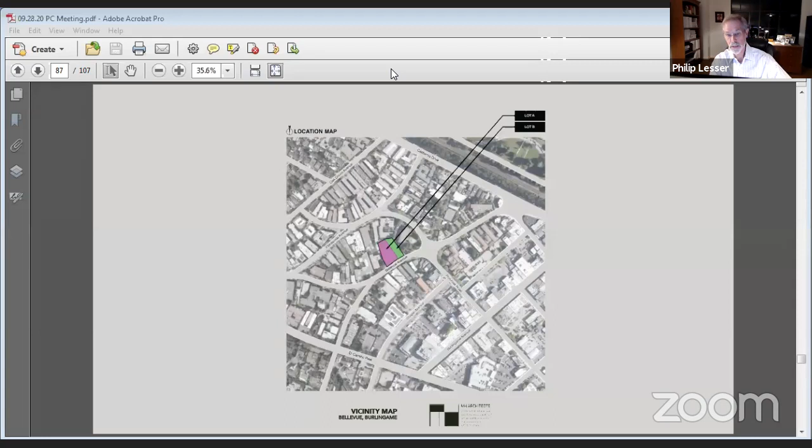Turning to the next slide, that'll be my last slide. The context: as I mentioned, we have different eras of buildings around us, different heights around us, different massings around us. So MH Architects was brought in because they're out of San Francisco. They know about shoehorning into infills. They also have a unique experience base in that they do a lot of work in the wine country, so they're very accustomed to, as they put it, bringing the outside in.

And with that, I'd like to ask Matt Hollis to show you what he's been working on for the last 2 years. Matt? Great, can everyone hear me? Yes, we can. Okay, fantastic. Well, thank you very much, commissioners, for hearing us tonight. And thank you, Phil, for the setup. This has been a wonderful project to work on.

It's a very unique site, in some ways challenging, but I like to think that we've risen to the challenge. As you can see in this slide, and if we advance to the next slide, one of the themes we've been trying to work with is basically breaking down the vertical massing of the building into 3 parts. The reason for that is that we've deliberately been trying to diminish the visual impact of a 6-story building from the pedestrian point of view, from the streetscape in general.

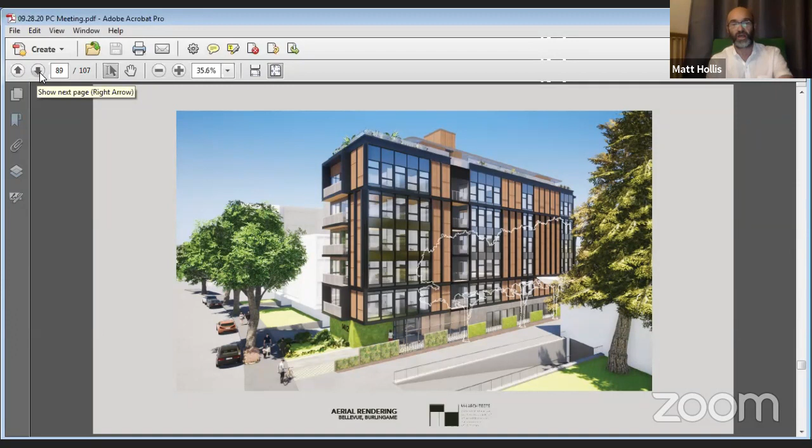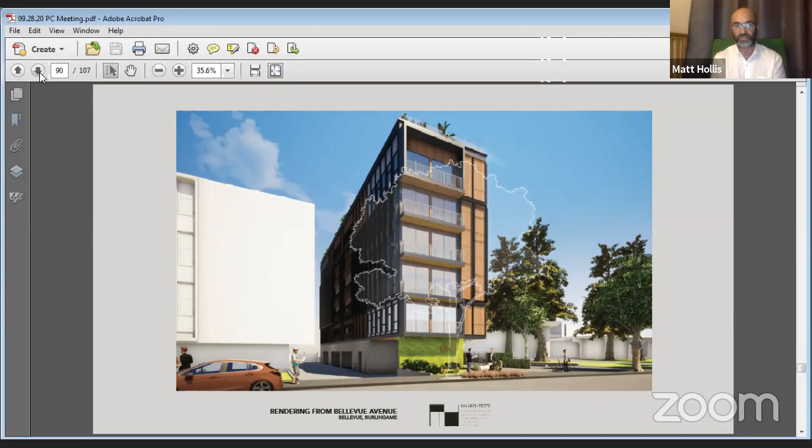So again, you can see the glazed parapet, and behind it, the green strip, so that the facade is elegantly framed vertically. One thing I'd like to point out is that currently there are essentially two driveways very close to each other, one for the existing apartment building and one for City Hall. One of the challenges for us was to stuff a building in between. I think one of the happy accidents in this design process is that we're able to diminish the effect of having these two driveways so close together, and in effect break them up, so it's a positive from that perspective.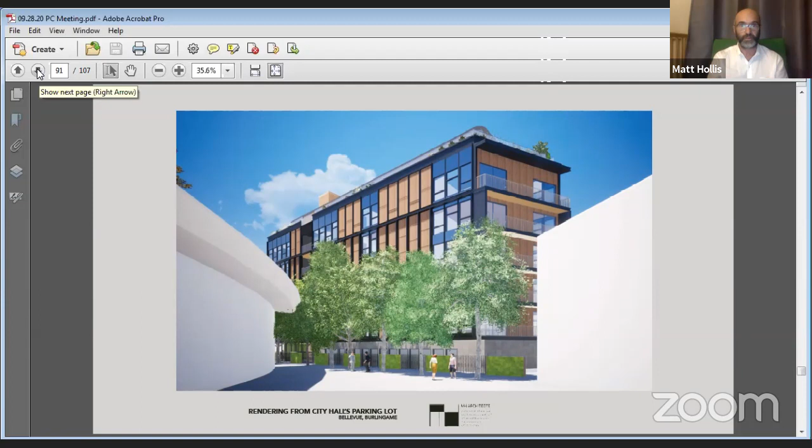With this slide, we mean to emphasize the ground level experience. You can see the entry proper is offset, which allows the opportunity to maximize the green frontage. The front yard, as I pointed out earlier, folds from a horizontal surface up to the vertical surface, offering an opportunity to truly ground the building and in some ways negate the presence of the ground floor altogether. The green wall continues, as I mentioned, with the bicycle parking along that 5-foot setback on the side, further emphasizing accessibility and approachability and linking the pedestrian experience on the sidewalk, effectively extending the sidewalk.

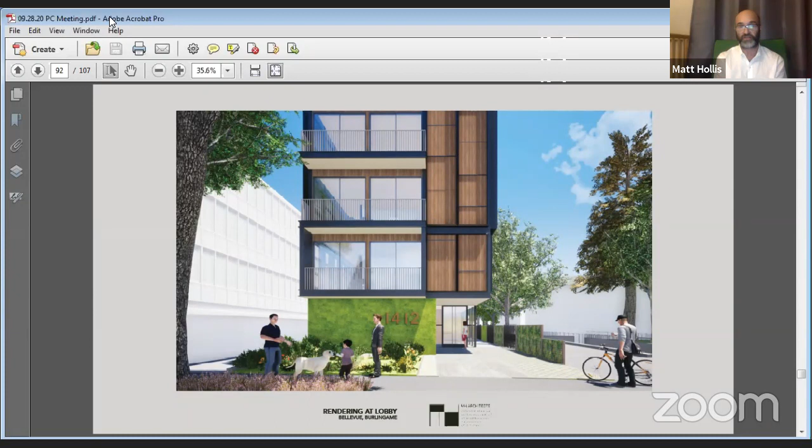In this area off to the right, that's where the entry is. With the abundance of glass at the entry, you can see that the green wall actually folds into the entry. So this is very much intended as a blend of interior and exterior spaces, blurring the boundary between inside and outside. I'll be candid, it's inspired by successful mid-century modern precedents, and the proposed design references an open floor plan and a pleasant, comfortable flow for both residents and passersby.

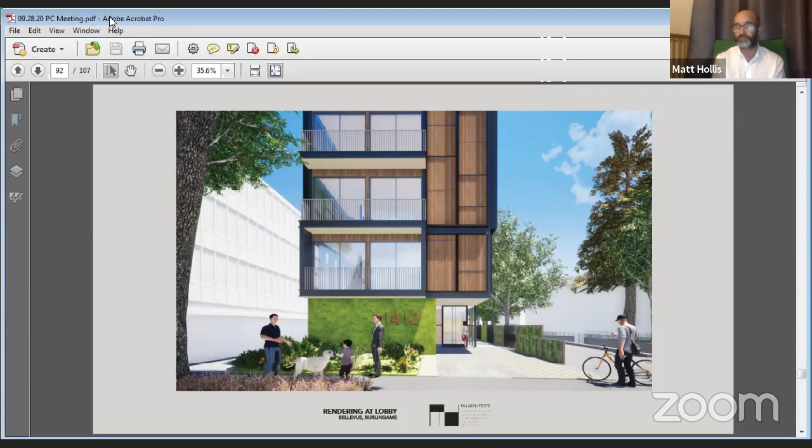I think that concludes everything that I have to say. Is there any questions? Thank you. Do we have any questions for the applicant?

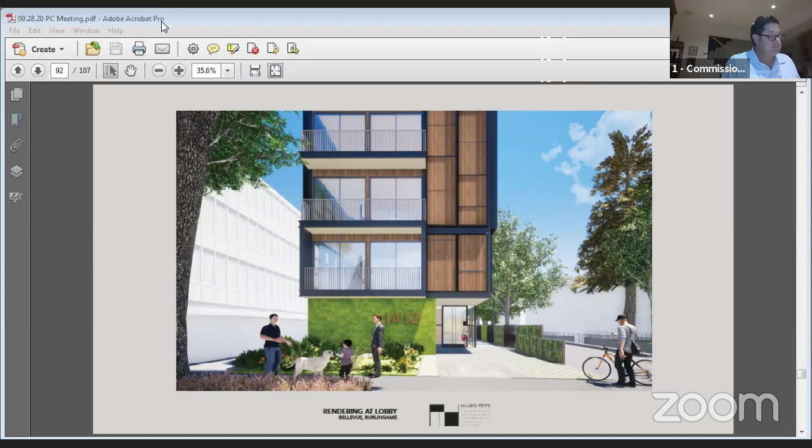Commissioner Schmidt: Yes, thank you. Question on mechanical. I'm looking at the rooftop and not seeing that. Is your mechanical equipment somewhere else? Yeah, if we could advance the slide to the supplementary drawings. This is the floor plan of the ground level, and you can see the mechanical is accommodated on that triangular pie shape on the bottom level. Okay, and that's going to penetrate up where? At the vertical elements, the stair. Maybe if we go to the second level... at all the stairs and around the elevators, there's a poche, which is basically intended as a vertical chase. Okay.

And are you intending any solar opportunities on the roof? We want to be able to accommodate it, but we're not planning on doing it initially. Is that something that could be integrated into the trellis system? Certainly, certainly. I don't know how you're not going to have to do it. I think it's something that's better designed in than glued on top. Definitely. Our approach was that we were going to design to accommodate it, but we weren't necessarily going to install it immediately. Okay.

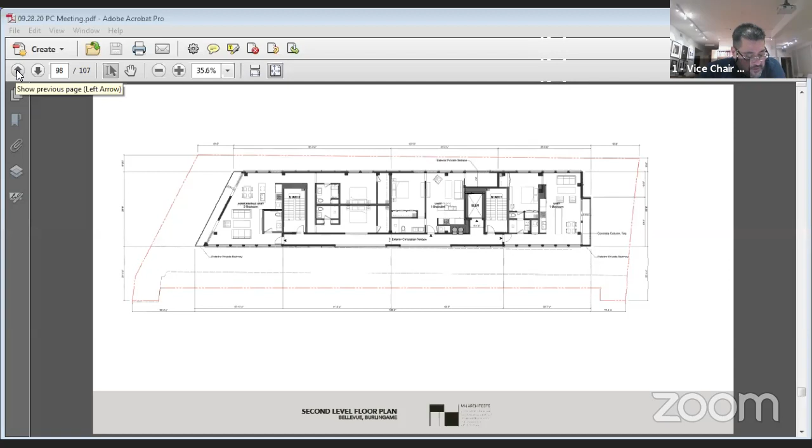Thank you, couple of questions. First one on parking. I know we have a requirement that there be a space provided for deliveries. I'm going to assume that for the most part, Amazon, FedEx, etc., they're all going to park out on the street, because they're not going to pull into the parking garage and then back out onto the street. So my question is, down on the first floor, you've got an area for surface parking for one service vehicle and one standard parking space. Can we assume that service vehicle space might also be used by someone coming for service to one of the units, like a plumber or electrician, and that space will be open for them? Is that the intent of that service spot?

Yes, yes. We're trying to reduce the amount of street disruption as much as we can, and within this very compact, somewhat challenged site, be able to absorb that intensity of use.

Okay, so then am I correct in assuming that the driveway into this from the street won't have a secured gate like it does now, where there's easy access for a service vehicle getting in there as necessary? I don't believe so.

Phil, do you want to? Actually, it would be great to have all of that, but what we've basically accomplished here, and I'm pretty proud of it, is looking at about 3,000 square feet of prime downtown real estate that's being used as a driveway. What we're basically doing is using that same 3,000 square feet for 2 buildings instead of 1. All these years, it's only been used for 1. We're not asking for any waivers on the parking. We've met all of the parking requirements for the new building.

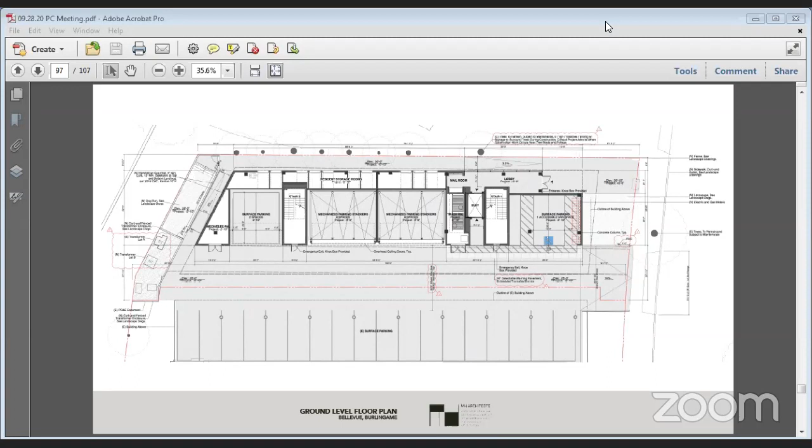Okay, I'm just hoping to ensure that at least one of those is a 2-bedroom unit. So that's great.

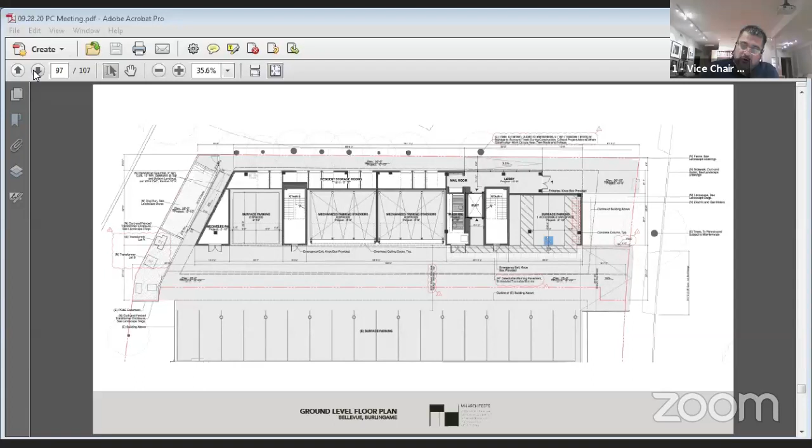My other question then is in regards to the rooftop terrace, the open air terrace. Have you given much thought to a detailed layout of that, to see how that works? I noticed, for example, on sheet L4 from your landscape designer, it's not a real detailed layout. There's just one sort of large furniture grouping shown there, but I'm assuming you're going to want to make it available for more than just one group.

So when this comes back for action, if you could give a little attention to that roof terrace so we can see how that might lay out and how it can work, I think that would be helpful. Whether it's you, Matt, or the landscape designer, if someone could give some attention to that, I think it'd be helpful to see how that's going to operate up there.

I think that's good direction, and we'll do that, Commissioner. Okay, all right, I think that was the extent of my questions. Thank you.

I have a couple of questions. One, did you do a shadow study? No, we haven't done a shadow study.

I'm not familiar with Burlingame. In San Francisco, a shadow study is usually related to being next to a public space, and I guess we're next to City Hall. Is that what the concern is, that the shadow will be cast on City Hall?

That, and possibly the buildings behind this address as well. There's some shorter buildings immediately behind, on the narrow side of the property. But yeah, it's a general question. If you did - no, we have not.

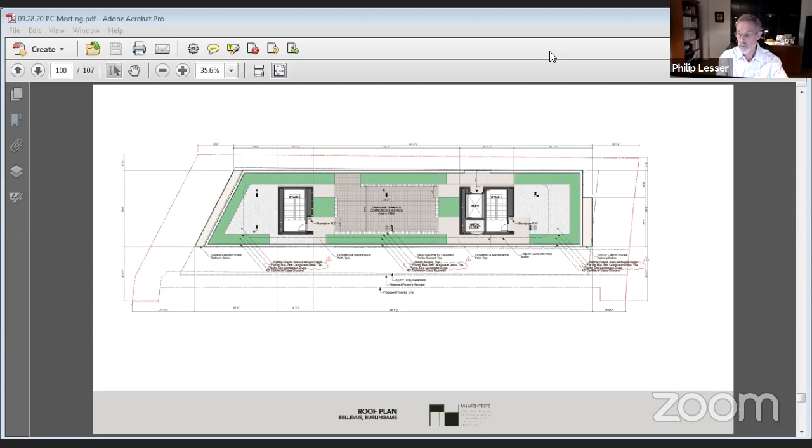Let me start by saying I fully support residential infill projects such as this one. We need them, and I think it's a very clever solution for a very awkward site that's been created. I'm struck by the words the architect used about attempting to diminish the impact of a 6-story building on the neighborhood and creating an approachable, accessible project with a warm aesthetic. And I frankly don't find any of these things to be true.

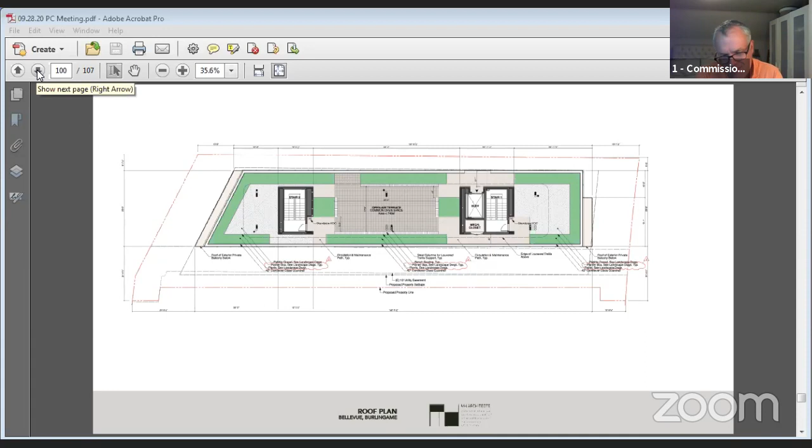The building feels like an office building to me. It reminds me a great deal of Cesar Pelli's building in San Francisco, although sort of an infant or embryonic version, maybe a 560 Mission, with its external apparent black steel frame. I see it's called out as gray, but I don't understand the frame, I don't understand the aesthetic. It does nothing to try to fit into the neighborhood, in my view. I don't think that would necessarily be a bad thing, except I think it's a pretty aggressive building, personally. The frame, I don't understand the frame in infill.

I understand the inspiration for mid-century modern, but I don't see this as a mid-century modern building. It feels very much like an office building. It doesn't feel like a residential building in a residential neighborhood. And I find that disturbing, frankly.

I want to like the building because I really support this kind of infill residential project, but this doesn't feel like it fits. It doesn't feel compatible with the neighborhood. It feels aggressively incompatible, in fact. So the words and the object itself don't match for me.

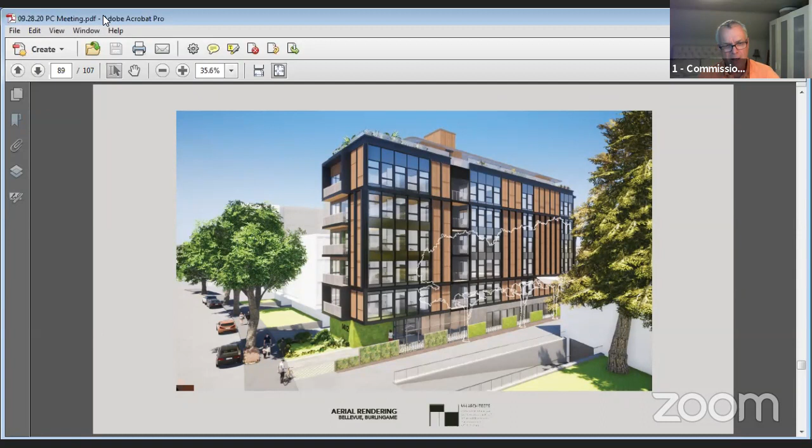I understand the notion that the architect wants to make the pedestrian experience a good one, and I support that as a goal, but this box feels like a heavy, busy box hanging over your head at the pedestrian level. So I have a real problem with this building with regard to its compatibility to the neighborhood, and its feeling like an office building when it wants to be a residential project.

Commissioner Camerado?

Yeah, I actually agree with Commissioner Loftus. I walked around and looked at a lot of the beautiful buildings in the area, like the Arlington around the corner and the Chateau. We have some amazing old, charming properties. And I know you can do a modern, creative building that complements what we have — we've seen it, we've tasted it in downtown Burlingame. But I feel this building isn't quite doing that.

It feels like it's just overbearing, and I'd like to see something a little softer. I'm not opposed to building on this site, and I'm not opposed to the idea of maybe a taller building, but not as obtrusive as I feel this one is. Something that may complement the building next door — something a little bit softer and complementary.

Vice Chair Taronis? Thank you.

Yeah, I agree with Commissioner Loftus and with Commissioner Camerado. Commissioner Loftus was struck by some of the comments of the architect. What I was struck by was the first and foremost idea of trying to wedge a project into this site, or squeeze a project into this site.

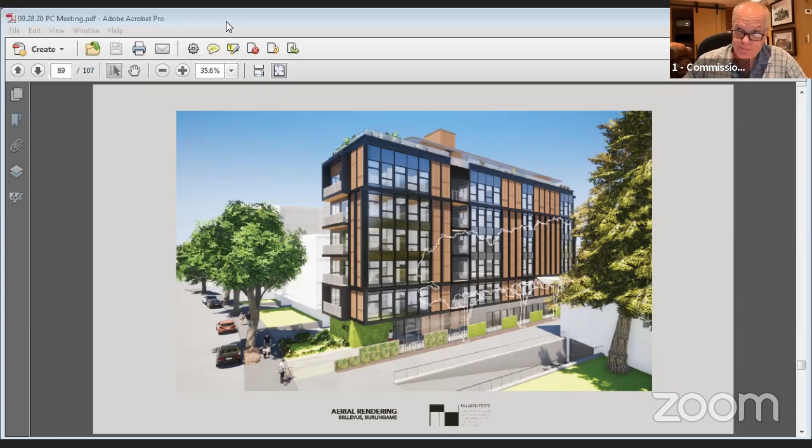So I move we bring this back on the regular action calendar. I'll second. Was that Vice Chair Taronis that seconded? Yes. Okay, so we have a motion by Commissioner Sargent, seconded by Vice Chair Taronis. Any discussion on the motion?

Yeah, I have a comment. I would ask that when this comes back for action, if we could get some interpretation from either planning staff or the city attorney or both regarding the impacts on parcel 1. I understand we have to consider the density bonus and the concessions and waivers for parcel 2 because there are affordable units being provided. But I'd like a clearer understanding of the impacts on parcel 1, assuming there are no affordable units on parcel 1. So if we can get a clear understanding from staff and city attorney on those impacts on parcel 1 and what we are required or not required to consider in terms of those resulting impacts. Thank you.

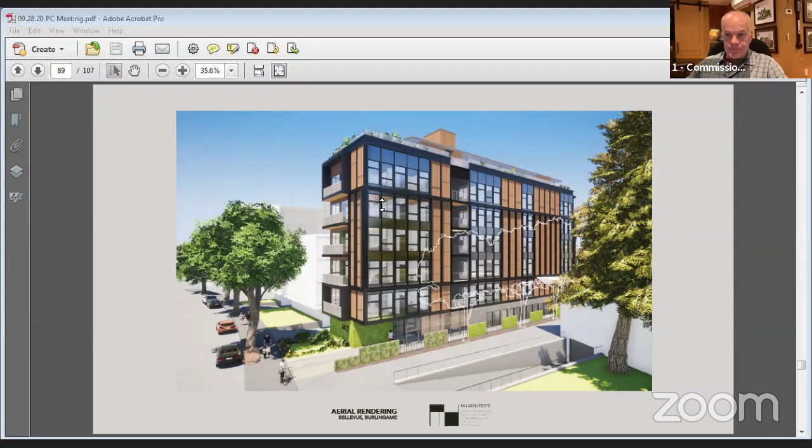May we have a roll call vote? Yes, Commissioner Camerado, aye. Commissioner Loftus, aye. Commissioner Sargent, aye. Commissioner Schmid, aye. Vice Chair Taronis, aye. And Chair Say, aye. So the motion passes 6-0-1-0. This action is not appealable.

We'll move on now to agenda item number 10, commissioners' reports. I believe there are no commissioners' reports tonight. And so we'll move on to agenda item number 11, directors' reports.

We have one FYI, 1453 Bernal Avenue, FYI for proposed change in exterior material to a previously approved design review project. Would anybody like to pull this FYI?

Okay, so is there anything to report from the city council meeting on September 21st? The most significant thing from that meeting, and we on planning staff are trying to figure out how to lay it all out in a way that people can follow, there's been a tolling of expirations for planning and building permits.

So to go back in time a little bit, there was already an extension of permits that were expiring this year due to complications with the pandemic, to provide projects more time. So pretty much any permit that was expiring between March and September—and you'll perhaps remember this, the Planning Commission had looked at this—was automatically extended to the end of this year.